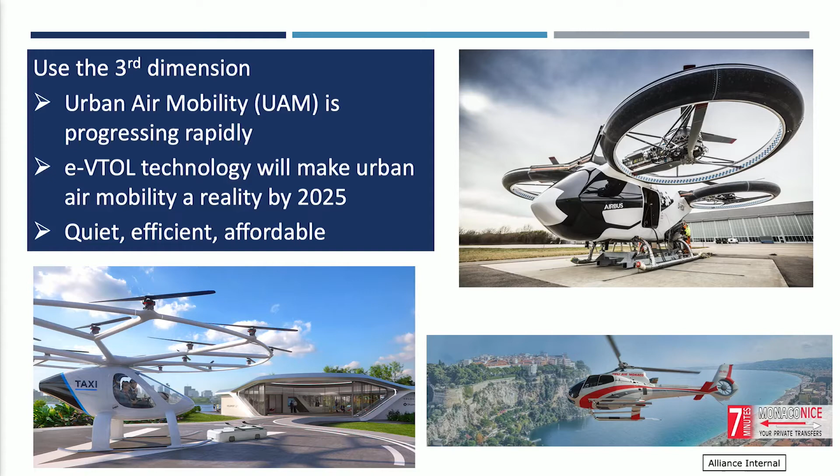Now the third dimension, using the air - all of these solutions we talked about are on the road and on the ground only. Urban air mobility is also in its very early stages, but poised for some explosive growth. I actually sit on an advisory board for Airbus, advising their executive committee on the future of mobility and how to connect air mobility with transport mobility, and they have some fascinating plans for the future.

What you see on the top right is an Airbus E-VTOL, an electric vertical takeoff and landing vehicle - basically drone style, it just takes off vertically. It's very quiet compared to a helicopter. It'll have passenger capacity of 4 to 6 passengers for short hops within an urban area. Think driving a ride-hailing or personal vehicle up to a certain spot, take the elevator up to the top of the building - they have a pad like this - and that gives you connectivity from the middle of the city to the airport or to any other hub, like a train station. It's very quiet, it'll be very efficient, and the focus is on making this very affordable.

Now I have an example of something that actually works right now. For those who have been to Monaco, there's a helicopter link between Monte Carlo and the Nice airport. It's a helicopter, so it's still very loud, but it takes 7 minutes, and the cost is about 130 euros per person right now, which isn't cheap by any means.

But when you need to get somewhere really quickly, I'll give you an example. We were sponsoring the Infiniti Red Bull Formula One racing team, so I was attending the Formula One event in Monaco. We were sitting on a platform by the pits, built right on the water. When the race got done, trying to get out of Monaco to the Nice airport normally takes between 2 and 3 hours. In less than about 18 minutes, I was at the airport. First we took a boat to a certain parking area, then a van took us for about a 5-minute drive to the helipad. We jumped into the helicopter, and 7 minutes later we were at the Nice airport.

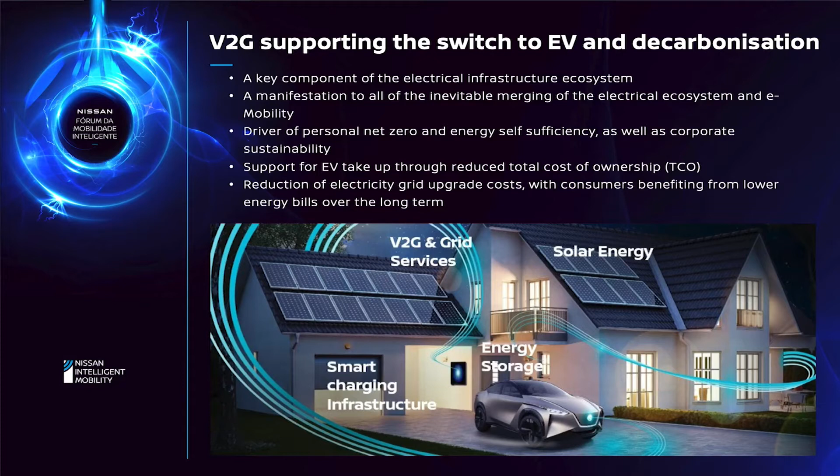If you consider the increase in grid energy demand when we have a large fleet of EVs, there are statistics at the moment for the UK that say by 2030 there will be an increased peak demand of some 30% on the electricity grid. So either we offset the cost of that improvement to the grid by using batteries, or we see the grid be improved and modernized at a cost to all of us. So using the vehicle batteries seems to me a really good way of trying to offset cost and improve the financials of owning electric vehicles.

There's a report from Warwick University that suggests that vehicle to grid, or vehicle to X, vehicle to everything, or vehicle to H, vehicle to home, using a battery for vehicle to grid can enhance the health of the battery. Through this work they've done, they're suggesting you might see a 9% improvement in battery life. And with that comes an improved value in used cars and for leasing products for the residual value, which then translates to cheaper monthly payments on your 3 or 4 year program. So that would be one very good reason to go V2G.

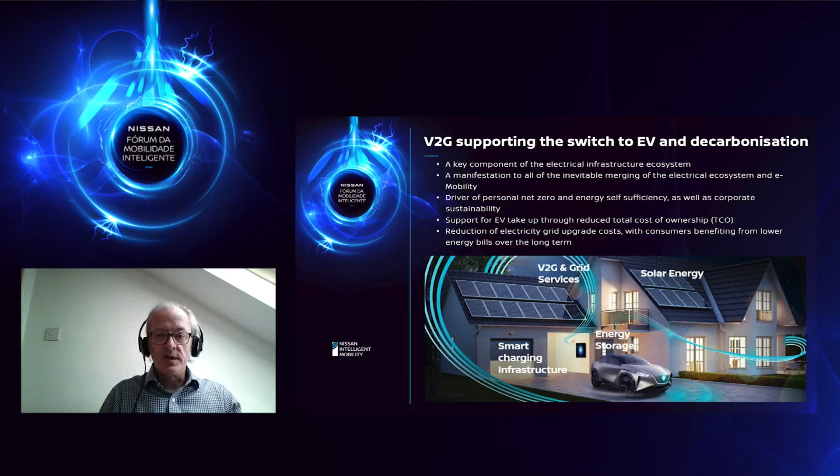So we've got a number of projects in the UK. They are all bar one funded or part funded by the Department of Business, Energy and Industrial Strategy, by a government office that focuses on zero emission vehicles, and by the Innovation Department, Innovate UK. These projects have been funded for the last 3 years, to the tune of maybe 50% grant funding or 70% grant funding, depending on the size of the organisations. At Nissan, we've got the privilege of being involved with all of them. As I said, my colleague Conor will be following my few short slides to talk to you about the OVO Kaluza program.

Within this bag of programs, we have commercial and public sector activity, looking at back-to-base fleets. We have residential programs where we're looking at leasing tied to energy supply with the Octopus program, as well as OVO, looking at the development of agnostic aggregation platforms to allow for the trading, charging and discharging of power. Most of these conclude this year and next year, and from which we look to find many findings and promote change in policy.

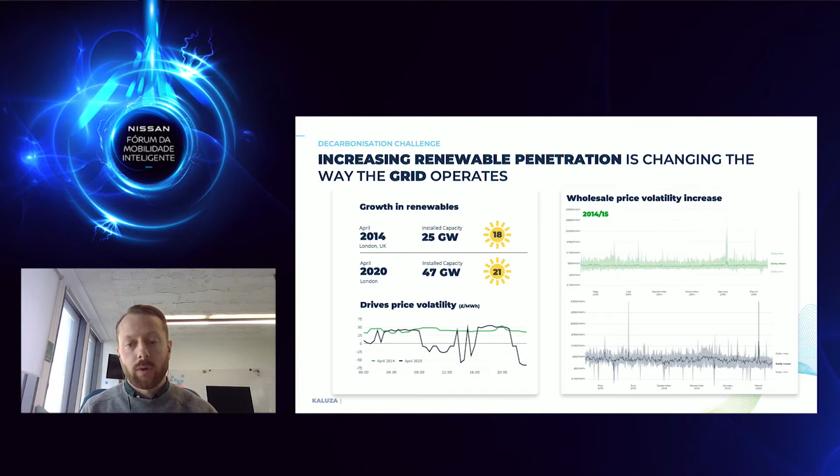So the volatility difference between those two days is significant. Really the main differentiation between them is an increase from 25 gigawatts to 47 of increased solar and wind. On the right-hand side of the picture, you can see the wholesale prices throughout the year. The key statistic we take away from last year was that in the UK, there were over 300 negatively priced periods, when just a few years ago there had never been any. That creates a real opportunity for technologies that can capture it.

So this is the same picture, except we've mapped electricity price to a coloured surface. Again, the aim is to show how from that scenario in 2014, where we had very stable power prices with a few spikes, we're now moving to a much less predictable, much more volatile electricity system, and we're really only at the start of the journey to decarbonize our grids.

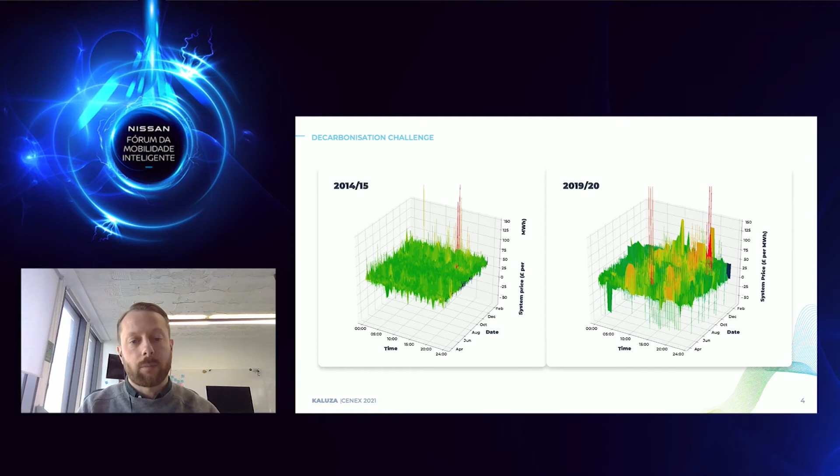This is just the evolution of grid conditions that we see associated with decarbonizing the power sector. But when you then start to think that in parallel to this, we need to decarbonize transport and heating, ventilation, and cooling, which adds more energy load to the electricity system, and load which is correlated. People want to charge their vehicles at the same time, heat and cool their homes at the same time. We can see the enormity of the challenge that lies ahead of us.

Trying to do both of these things in parallel is going to be really difficult unless we connect these new electric loads and manage and optimize when they charge in order to make most efficient use of the overall system. So it's a huge challenge, but a really massive opportunity for technologies that can address it. And no technology in our eyes is better placed than vehicle to grid, which can truly unlock the potential of an electric vehicle and its benefits to the grid and the benefits that can offer to drivers and customers.

So that was all I wanted to say on context to set the scene and give you our take on the decarbonisation challenge.

With Nissan in the UK, as Frank mentioned, we've been working on Project Sciurus, which has now rolled out the world's largest residential vehicle to grid program. For the last three years, with the help of government funding and a really great collection of partners, we've installed 350 vehicle to grid charge points in homes across the UK grid, and I'll show you those in a second in a live demo, and we are optimizing their control to meet the needs of the grid and the customer.